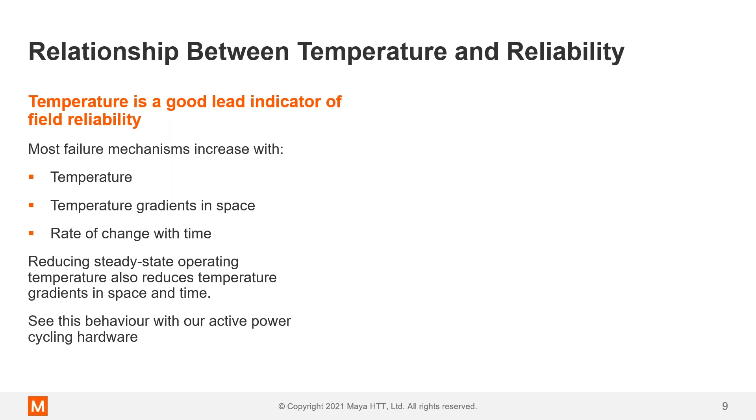I do want to point out that we offer hardware to measure the cycles of a part. We have the power tester here where we can cycle that part, and we can measure the thermal performance degradation of that part as a result of temperature cycling or power cycling, and also, when the part fails, what component within the IC package failed.

So while we generally look at, when we do a thermal design, it's mostly all about the junction temperature, but at times it's not just reliability in terms of lifetime reliability, but it's also functional or operational reliability. And that could be the steady state operating temperature of the device, but it could also be the temperature between different components of that electronics design.

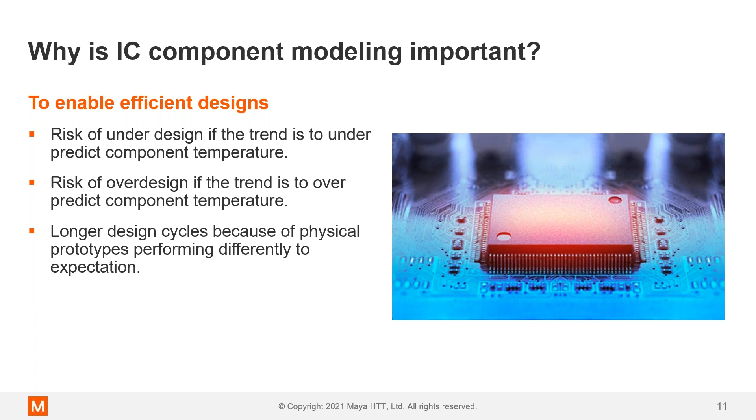So there's a number of approaches to modeling packages, and we're going to start with the simplest, which we'll call simple, all the way to the most complex. A simple model is just really a bounding box of the package. So whatever leads or solder balls or whatever, we're just representing that outline with a block with some effective thermal conductivity.

And those conductivities, it's not hugely important what those values are. They just have to be a reasonable value. I think any value between, I've seen, anywhere between like 10 and 20 watts per meter K is a reasonable value for this type of representation.

And this would be used early in design process when you may not know what parts are being used, but you want to get an initial assessment of what risks you may have, or how the thermal design might have to be driven, whether it be forced convection or yes, this part is going to need a heat sink. So you can learn things early on, even at a simple modeling level.

Generally, what we say for the accuracy of the model is that it's going to be a rough estimate of the air and board temperature. So you can't expect to model a component as a block and get any reliable estimate of any kind of junction temperature of that device.

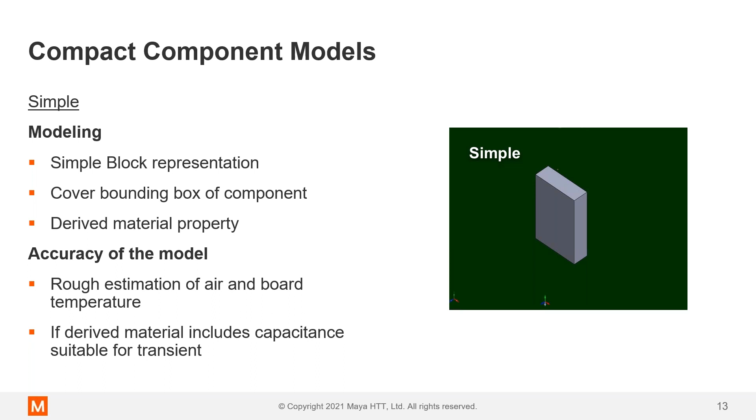One step up from that, and perhaps the most common modeling approach, is a 2-resistor model. This is common because you see a lot of data sheets for IC packages that explicitly list what the junction to case and junction to board, or junction to bottom, thermal resistances are. They're very easy to implement that way.

Essentially, we have taken the same bounding box approach, but rather than having effective thermal conductivity, we've replaced that with a resistor network to capture the heat going from the top of the package to the bottom.

The accuracy of these can vary widely depending on the heat transfer path in the model. So if you have a 2-resistor model with a big heat sink on top, getting the junction to case value correct, I think you're going to get reasonable estimates for the junction temperature.

But we do say the accuracy of this model gives a good estimate of air and board temperature. It's not suitable for transient analysis because it's just a resistor network, not a resistor capacitor network.

But I think these are probably the most commonly used. One thing worth pointing out is you could develop a 2-resistor model either numerically or via measurement.

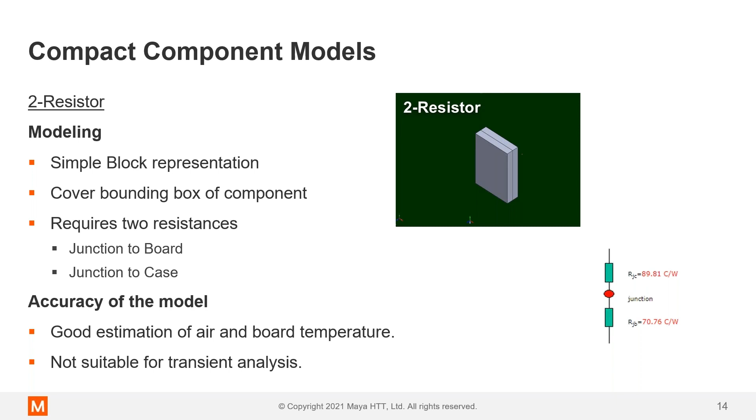So you can set up a physical measurement to do those, but you can also set up a numerical equivalent. You can easily build a top cold plate or ring cold plate model and extract what those thermal resistances are. So these could be developed either through measurement or through simulation.

The next approach would be, rather than to use 2 resistors, use multiple resistors. The most common approach to this is what's called the Delphi model, and this is a JEDEC standard. JEDEC has outlined the process of developing a multi-resistor network model for an IC component.

It essentially is, depending on the package type, you would impose, let's say, 40 sets of boundary conditions on this detailed component model and tune your resistances so that you minimize the error between the detailed model and your resistor network model.

The hope is that when you use these 40 boundary conditions, ultimately you're going to get a quote unquote boundary condition independent thermal network. That's the goal.

Some of the difficulties with this approach is knowing what topology to use for the network. You could start with a junction that's connected to all the external nodes. You might have a top inner area, top outer area, sides, and then bottom inner and bottom outer. Then you use some optimization algorithm to determine what are the best resistances to use between those.

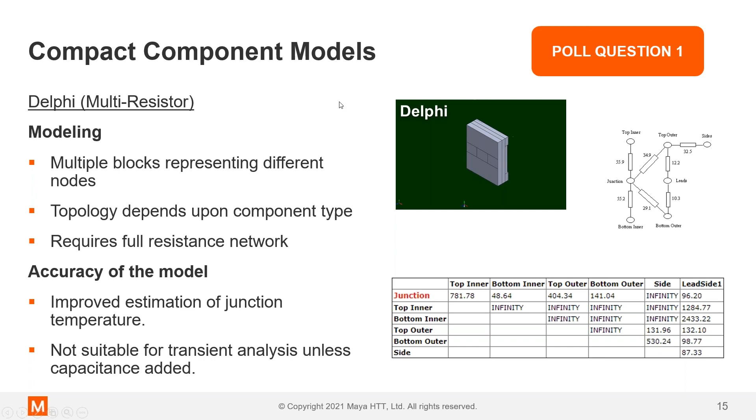The next and final approach is detailed, and we've broken it into two levels: detailed 1 and detailed 2. At this level, we're modeling the physical geometry of all the components within the IC package.

Detailed 1, versus detailed 2 over here—we have explicit lead frame, we have all the leads coming out. Detailed 1 has merged those together and would, as a result, have some effective material properties to represent this. The reason you choose detailed 1 over detailed 2 is computational expense—this would require less mesh to resolve than the fully explicit one.

The difference between these two, you have to decide the purpose of using the package. If it's only for temperature prediction, detailed 1 may give you the accuracy you need. But if you're going to go downstream and do thermal mechanical stress analysis with the temperatures predicted from Simcenter Flotherm XT, you would want the fully explicit detailed 2, which can be mapped directly into Simcenter 3D for thermal mechanical stress analysis.

This detailed approach gives you the best opportunity to have the most accurate temperature predictions. And if you have the heat capacity of the individual elements, it's going to give you the best transient prediction as well as steady state.

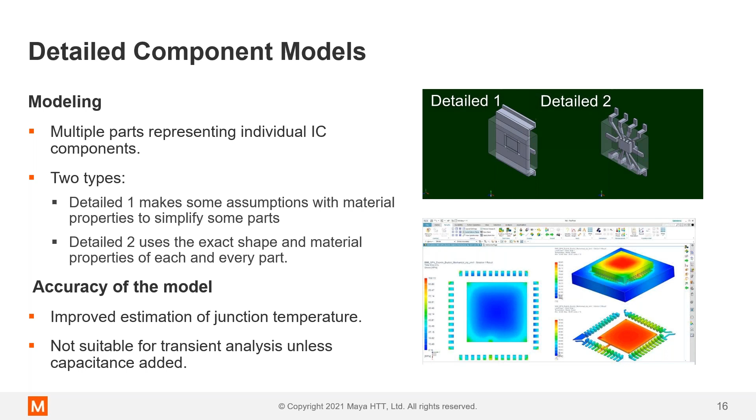Let's look at all the different modeling methods in terms of accuracy versus efficiency—those are the methods we discussed. In terms of accuracy, the simple approach is going to have the lowest accuracy. If you do happen to get accurate temperature predictions at a junction once you prototype and measure, and that simple approach was dialed in on your measured junction temperature, consider yourself lucky—that's just luck, not an accurate predictive way of modeling.

But there's a penalty in terms of time. The quickest model build time and analysis time is definitely from a simple approach where I just have a block, give it a conductivity of 10, and it has some heat dissipation—you can build a model like that very quickly. A 2-resistor model could be quick also; you get the model from the vendor or just read a couple values from a data sheet, so that's very easy to do.

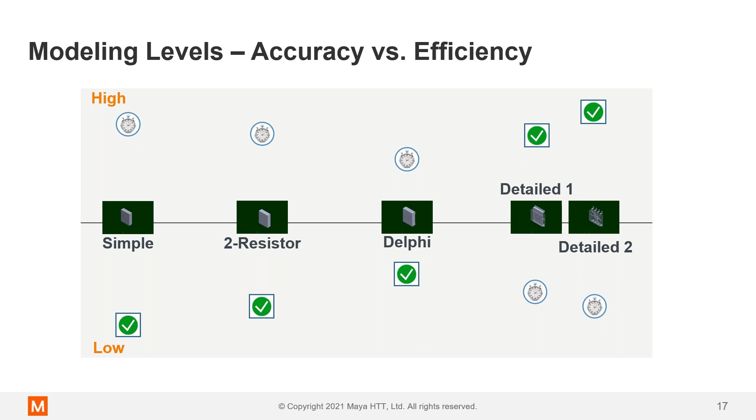So I would say Delphi could even be down here in terms of time, but computationally, once you get it into the model, it's very fast. These detailed approaches computationally are going to be very slow because I have to mesh everything, and generally the mesh is going to be higher than with all these compact modeling approaches.

If we look at the methods with a table summarizing accuracy and benefits, a couple things stand out. With the detailed model, all internal dimensions and material properties are required. So if you're a system integrator wanting to build a detailed, explicit model, it might be difficult because you're likely not going to be able to learn the internal structure from your vendor directly, so you don't have the information to build it. There's a bottleneck depending on where you are in the thermal design ecosystem. If you're an IC package vendor, you know all that detail and could easily create a detailed model like that.

Most thermal designs will use a combination of all these approaches. While the simple block model is used early in the design process, that doesn't mean you're not using that approach later too, because typically you'll choose a handful of critical ICs, temperatures, or parts that exhibit close to out-of-spec temperatures. Then you'll want to model that in more detail to get a very accurate prediction, because you don't want to risk over-designing your thermal design by not accurately predicting temperatures. Use the block approach to map where you may have issues, then augment your design with more detailed approaches in those areas. Chances are most designs will use a combination of all of these.

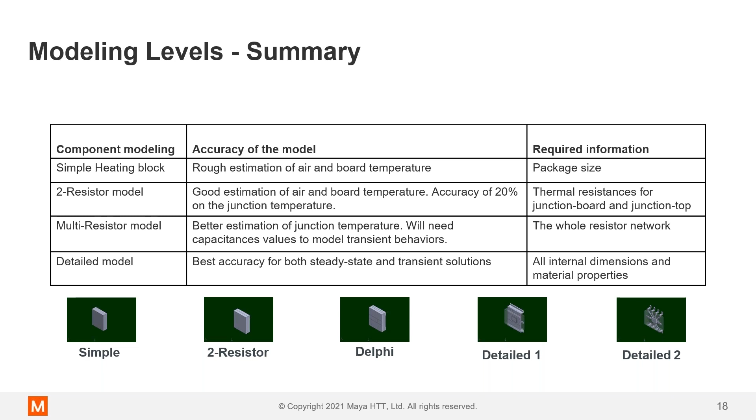I wanted to point out one other methodology we've been working on the last couple of years, called the FANTASTIC reduced order modeling approach. You could think of this as an approach to dynamic compact thermal modeling, so it's suitable for transients. It's an extension of the FANTASTIC method pioneered by Professor Lorenzo Codecasa, where FANTASTIC is an acronym for Fast Novel Thermal Analysis Simulation Tool for Integrated Circuits.

It differs from the typical compact thermal model, because the compact thermal modeling approaches we have in industry are really intended for supply chain support, where a vendor can supply a model to their customer. This is really to enhance our predictions inside thermal analysis software like Simcenter Flotherm XT, where this reduced order modeling approach currently benefits parallel design processes. Let's take all our model information from our 3D simulation model and create a reduced order model of that, so we can facilitate electrothermal design or maybe system level design.

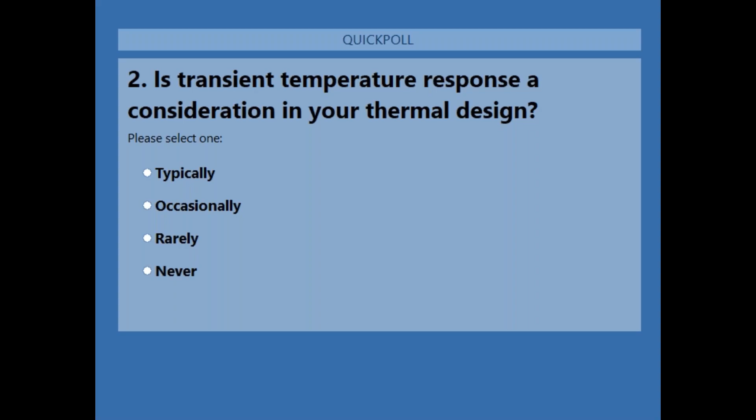And people a lot of times design to, say, a thermal design power. Here's a chip, here's the power that I should design to from the data sheet. But I see a trend over the last few years where more and more thermal design is based on, say, use case, and a lot of it is because electronics are in everything now. With our smartphones and IoT, electronics are so much closer to human contact that there are more considerations.

We have multiple environments that our devices operate in. Us picking them up and holding them—if they're too hot, if somebody thinks they're hot, that could affect the success of this product in the marketplace. So understanding the dynamic response when it comes to temperature of our end product is becoming more and more important for thermal design.

That's a great added tidbit there, John. I think we see that reflected in the responses we got as well, where the majority of respondents will see it in some form when looking at transient temperature response, with a small handful—about 9%—saying they've never seen it. So this lines up with how you've seen that shift in industry as we start seeing electronics in everything. So with that, I'll pass it back to you. Great, thanks.

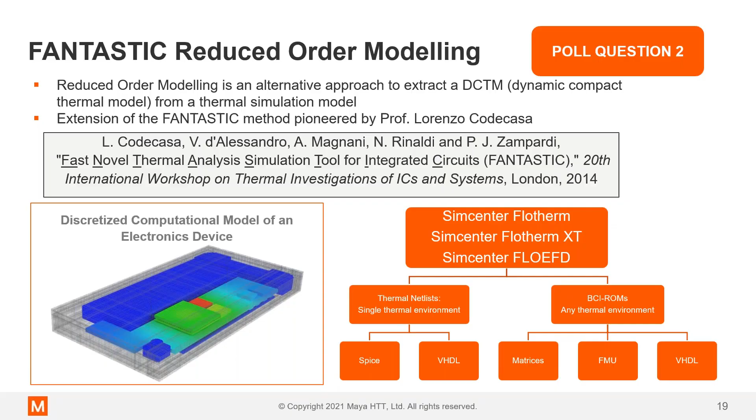Okay, so how do we go about creating these IC package thermal models? What are the challenges in generating a detailed thermal model? I've kind of alluded to them earlier, but where do you get the CAD geometry and material properties?

If you're an IC company, you might have a better opportunity of getting that information, but it may not actually be in the format you want, like a 3D solid model. So you may have to spend some time actually building up the CAD geometry. And where do you get the material properties? I don't know if you've spent much time looking at material data sheets, and I haven't for a while, but in my experience, you might be able to get a thermal conductivity, but you really get no indication of what the heat capacity of that material is.

So you end up making some engineering estimates on a lot of things just to build up a detailed model. There are barriers in collecting information and building 3D models, which may not be your area of expertise. There's also the concern of matching the detailed modeling approach to the way you're going to model the PCB. I'll talk a little bit about modeling PCBs today, but that will be a focus for next week's session. But really, when you model a detailed IC package, you want to match that with a detailed representation of the board, at least in that area. So how do you match that?

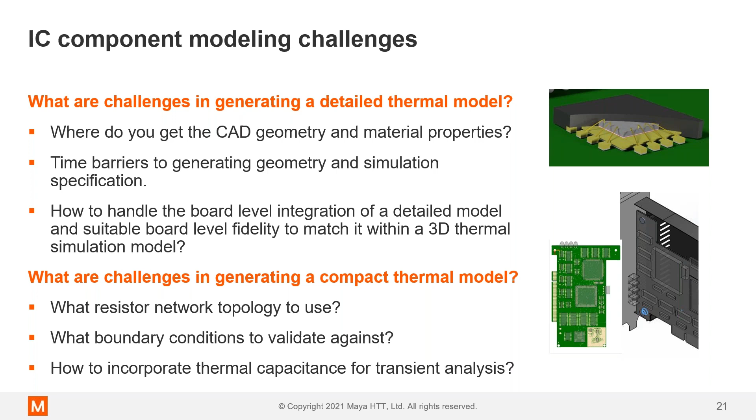And if you did want this to be transient suitable, how do you incorporate the thermal capacitances for transient analysis? There's a lot of work potentially in building these compact models or detailed models. And if you get anything from your vendor, it's going to save you a huge amount of time and improve the accuracy of your models.

One thing we offer to assist in the creation of detailed and compact thermal models, and we've had this spinner product of ours for some time, is Simcenter Flotherm Pack, which is a web-based subscription tool. At a high level, you log in and you get presented with many package styles you can start with, and then you pick the package style you're wanting to build a package for.

Historically, there's been two types of customers for this: one, the IC vendor who knows all the detailed information, and two, the system integrator, which has a need to build a more accurate predictive model but has very limited data. They have the data sheet, which may have a mechanical drawing and give them some dimensions, but certainly not all the information that is needed.

So this kind of interface supports both, where you either know all the information or you have very limited information, because once you've chosen the package style, it walks you through a wizard where you can populate the answers with your known data, or have Flotherm Pack fill in those blanks for you. So at the end, you have a reasonably accurate predictive model based on common values used in industry.

Once you have that, then you can either download the detailed model and run it in Simcenter Flotherm XT, or you click a button to generate a 2-resistor or Delphi compact thermal model. So all the technology or decision making to develop a Delphi model is integrated in this tool. You just click a button, say I want the Delphi model, and then it emails you once it's complete.

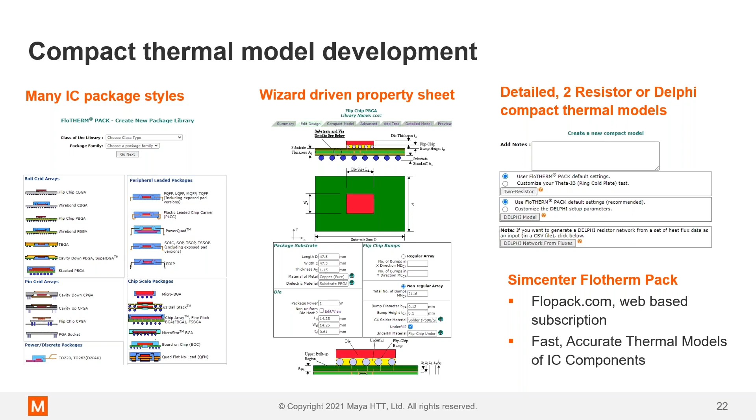The other method is relatively new, where we have this Flotherm Package Creator, which I'm going to talk about. I'm going to do it through a worked example within Simcenter Flotherm XT, and look at the workflow that you would use.

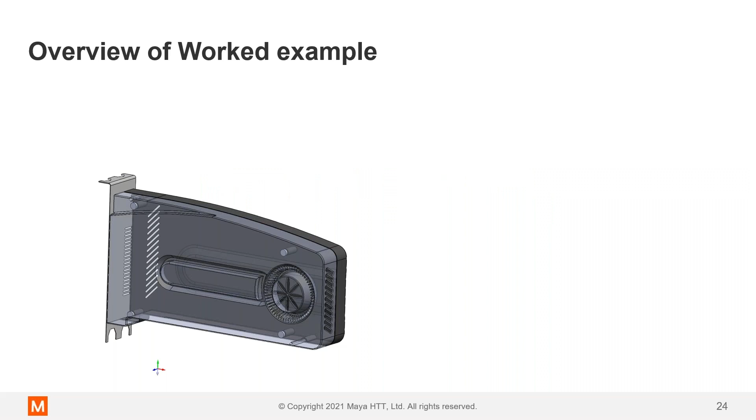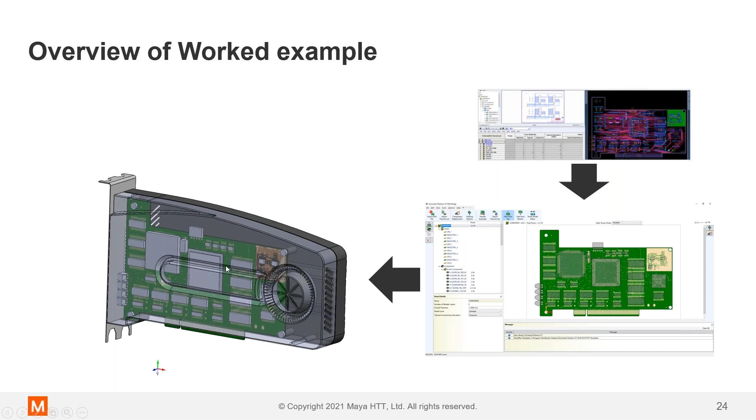Typically, when you're doing a thermal model in Simcenter Flotherm XT, you're going to start with CAD. You have some CAD data, and you also have ECAD. So say a routed board in Expedition, you read that board into Simcenter Flotherm XT EDA Bridge, you bring that into Simcenter Flotherm XT where your CAD model is, and then you analyze it and get the temperatures that you're looking for.

To model the board, we've read in the design. Here we've identified 5 components that are deemed critical, that we want to model in more detail.

Since we're going to model these little SOP packages in more detail, and we notice there's copper in this area, that's going to affect the way we want to model the PCB. We want to not smear this copper all across the board. We really want this discrete area where we have a lot of copper represented in our board.

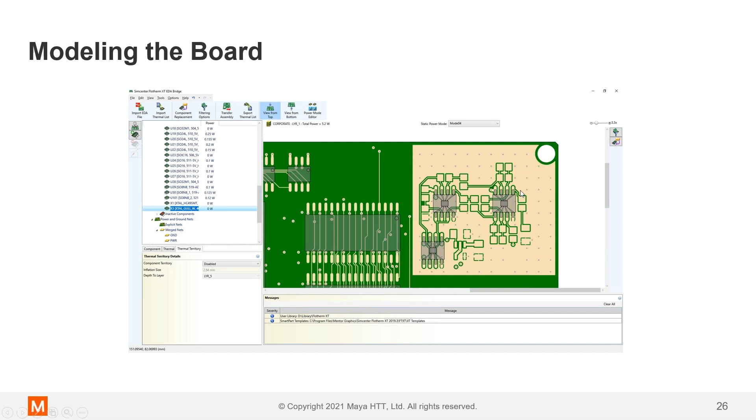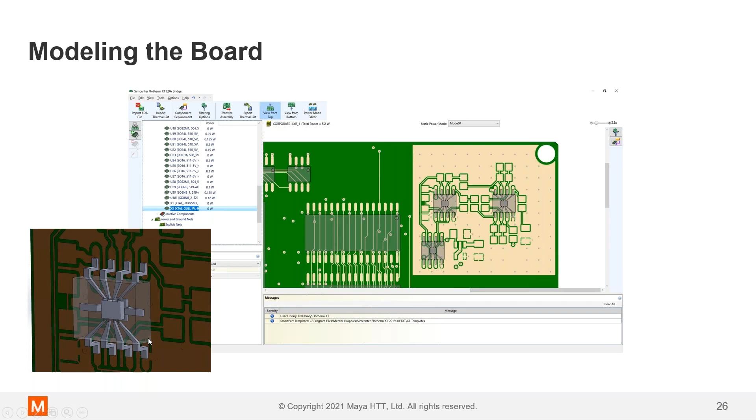So we're going to swap those components with a detailed approach. And after we transfer to Simcenter Flotherm XT, we have the explicit copper represented and a detailed representation of that package. So, how to create the package model.

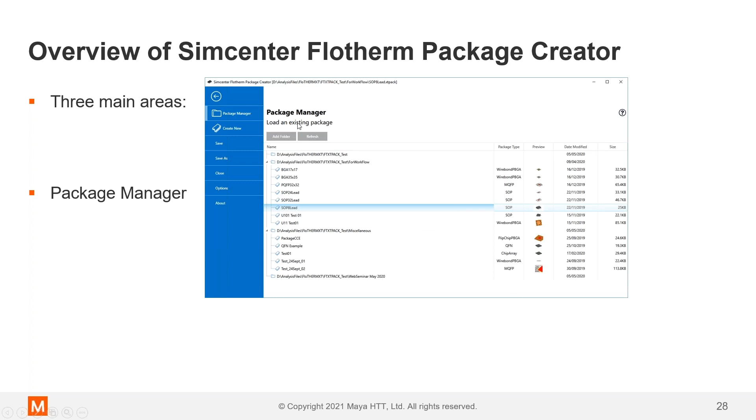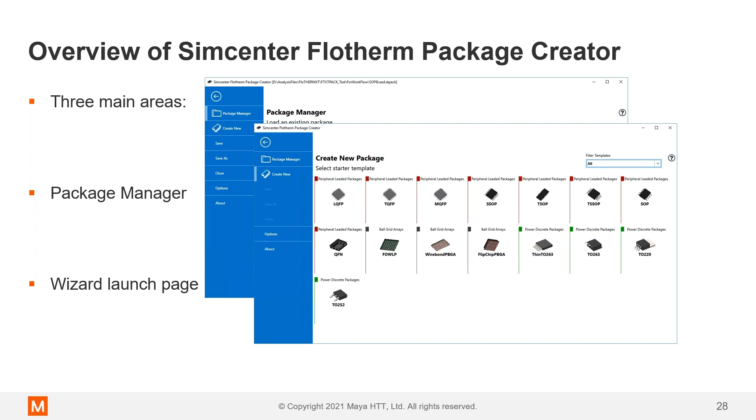I want to introduce you to Simcenter Flotherm Package Creator. There are 3 main areas: the package manager, these are packages you've already created; the wizard launch page, very similar to Simcenter Flotherm Pack, where you start with a wizard based on the package type; and then the package detail, once you've worked through the wizard, where you have the opportunity to modify values and make some thermal modeling choices.

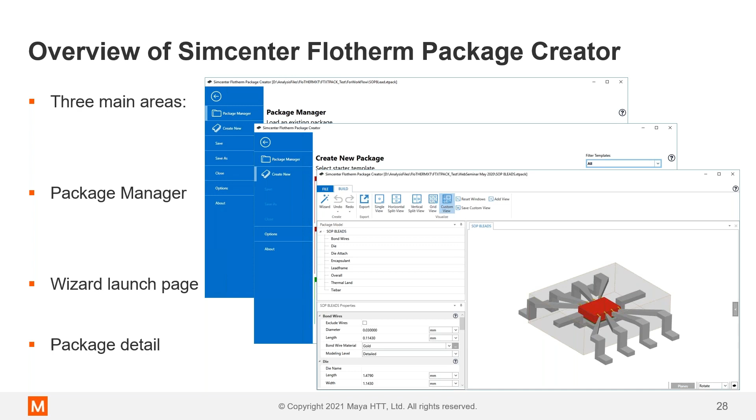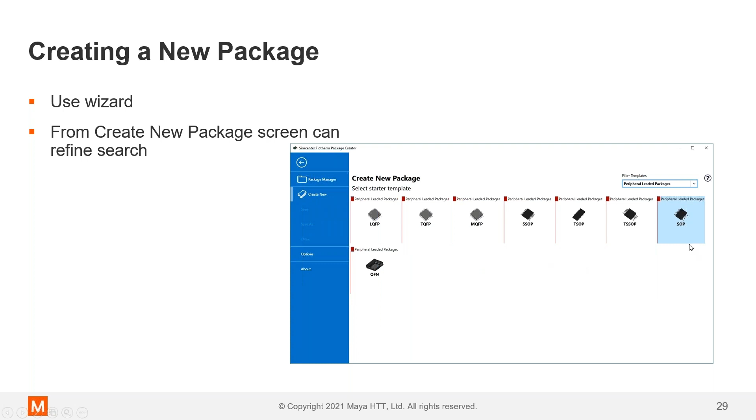From the Create New Package screen, you can refine the search for certain package types and then make your choice. In this case, it was a SOP that we wanted to use, and then we launched the wizard. Give it a name, standard outline, and then we have all these parts that we can use directly or start with. Pick the one that makes the most sense based on the package we're trying to model. So this information, we're going to read off the data sheet.

Give it a power, and the die size is automatically populated. Again, we can change these values here or in the property sheet once we've worked through the wizard. It asks us this up front because die size is very important in terms of the overall thermal performance of the package, and whether or not this particular package has an exposed pad.

Lead frame material—once you've worked through the wizard, you see all the package information. The areas of the interface are what we're calling smart parts, all the different sub-assemblies that would be used to build up this part, each with its associated property sheet. Over here is just a graphical display of that part.

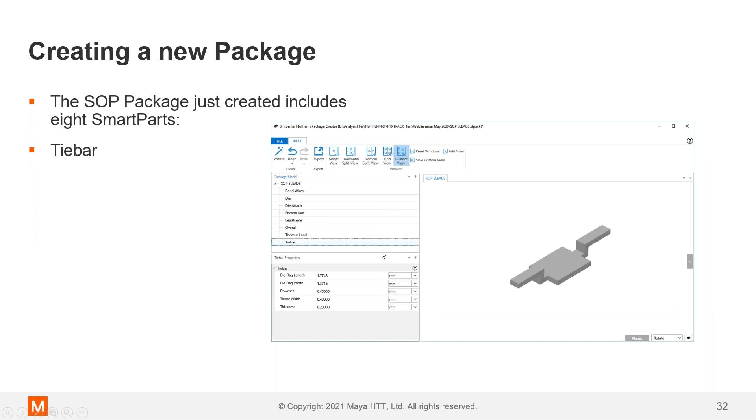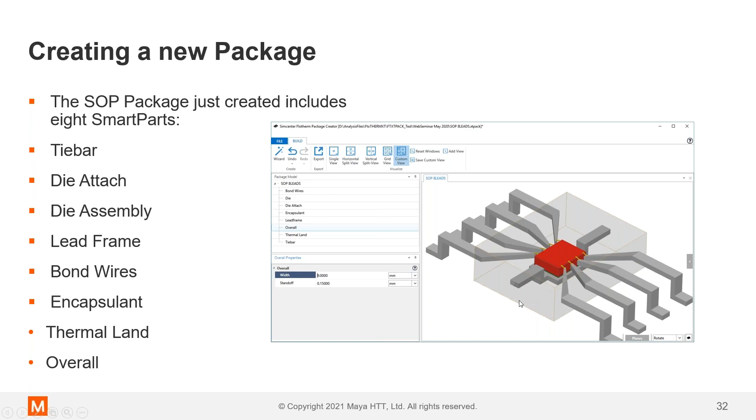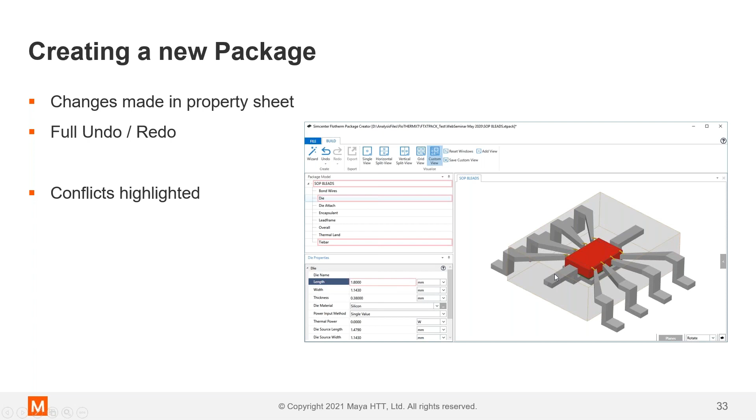So for this SOP package, we have a tie bar, the die attach, the die assembly, the lead frame, bond wires, the encapsulant, and thermal land if we have one of those, and overall. We can make changes and see it update in the user interface window. It supports full undo and redo, and it highlights conflicts—if you've put in information that doesn't allow it to build a physical geometry, it's going to flag that to you.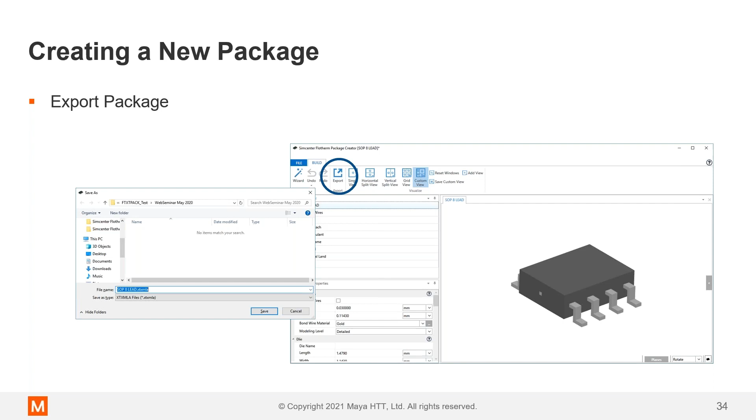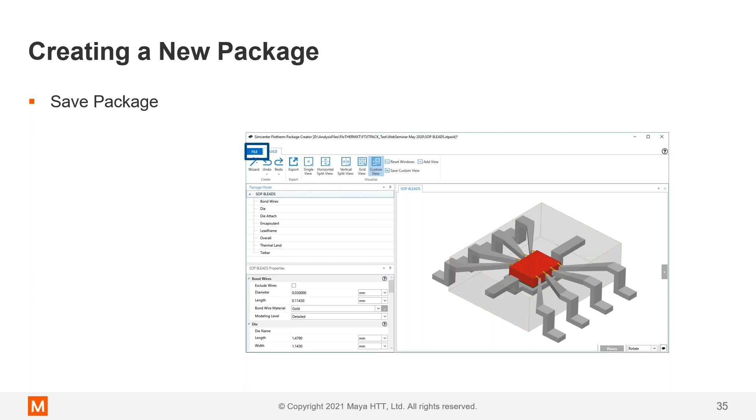Once you've built a package, you can export it into this XT XML-A format. This is a format for Simcenter Flotherm XT, a human readable XML file that defines the construction of that package. So it's a shareable package for you to bring into Simcenter Flotherm XT or share with a colleague or a customer. You can also save it directly here, as part of your interface in Package Creator.

And you could also load—somebody provides you a model, you can load it in here, make changes to it, and then save it out again.

Take a quick look at if we did a BGA. So we're also using a BGA package in our model. Some things to highlight as we walk through the wizard—it's probably kind of difficult to see here, but the package size, number of solder balls, and the die size are some of the major choices there.

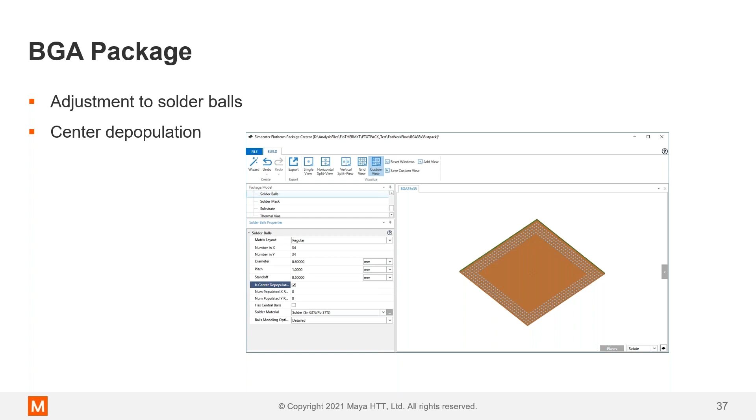Once we work through the wizard, we see all the solder balls are here, but we can say it has a center depopulation here, but it has central balls. We could do it that way.

And then some examples of modeling choices would be if we want to not model each individual solder ball, but model those areas with an effective conductivity, we can do that, and it can calculate the material properties just based on this quick setting.

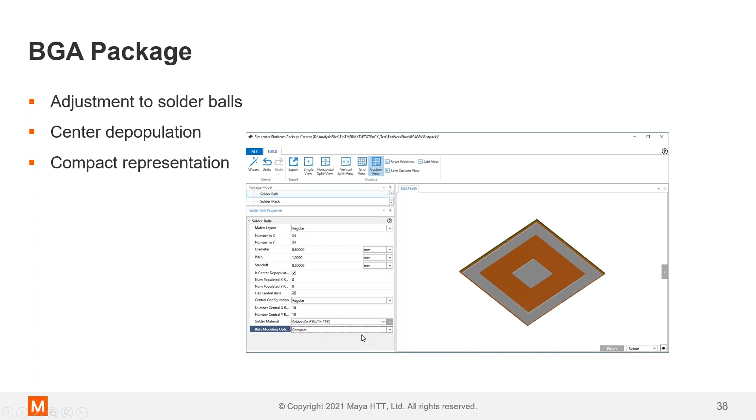Another area we may choose to make modeling choices is bond wires—whether we model the bond wires at all, or if we model them in a compact way, so there's less meshing. It could be that our bond wires aren't critical for our temperature prediction, but we want to include them, so we may choose this option right here.

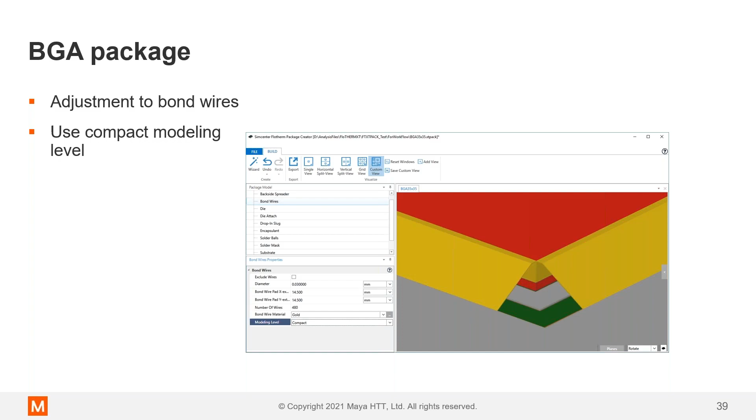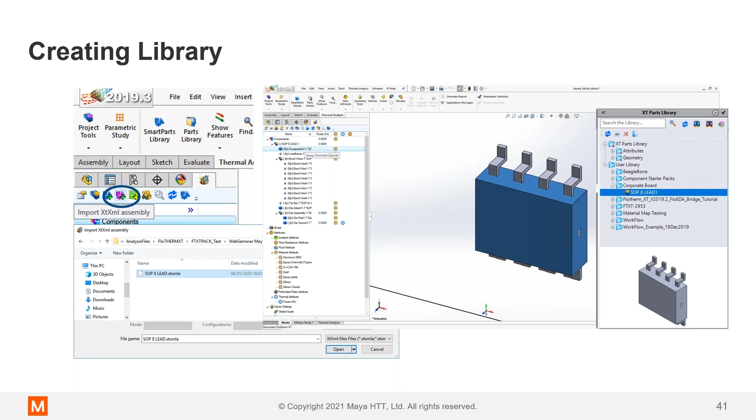Okay, so create a library. Once I've built up the models and saved them to disk, I can, inside Simcenter Flotherm XT, import those assemblies. There I see the part in Simcenter Flotherm XT, and then I can just drag it over to my library. Once it's in my library, I can use it in the EDA bridge to swap components.

So we have our model, we have our CAD—we just have the CAD. We haven't identified this as a Simcenter Flotherm XT model. The way you do that, just quickly, is you walk through a wizard to help set up the model.

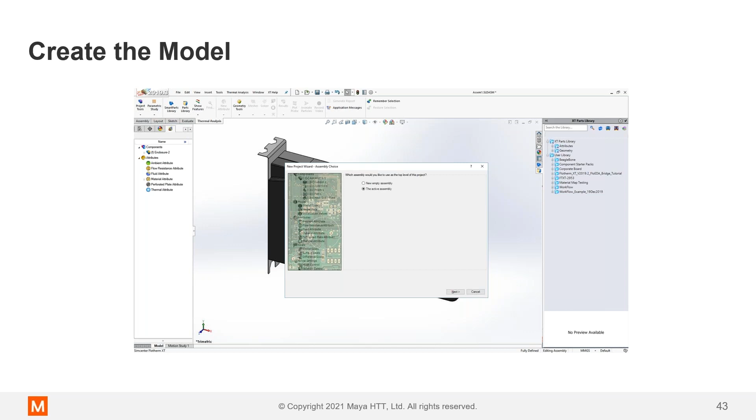You have a choice—do you want to start with the empty assembly? In this case, we're going to start with the active assembly. We have a CAD assembly opened, and we're going to build a Flotherm XT model based on this assembly. We've walked through the wizard, and at the end, we have our Simcenter Flotherm XT model.

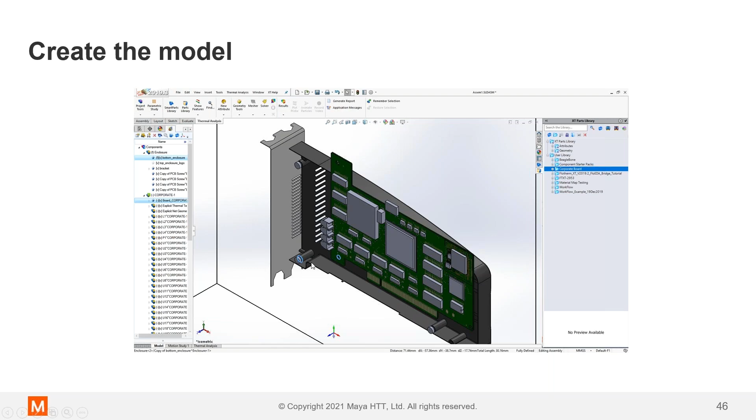I'm going to show you, I'm going to position the board. I just have these 2 edges selected, and I'm going to make them concentric. Now it's located properly, and then I can mesh it and solve it.

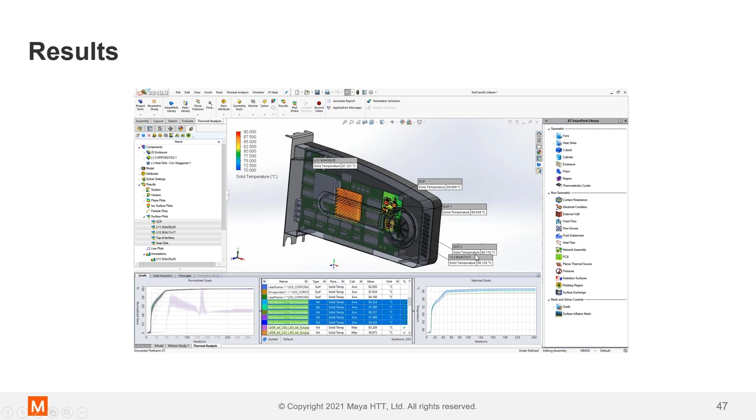So I've added a heat sink, and we'll just take a quick look at some of the results. One very useful feature for Simcenter Flotherm XT is this ability to color components with respect to their temperature limit, whether it's junction or case, so you can easily flag which components are critical. Like I said, next week's session is going to talk about the EDA bridge interface in more detail.

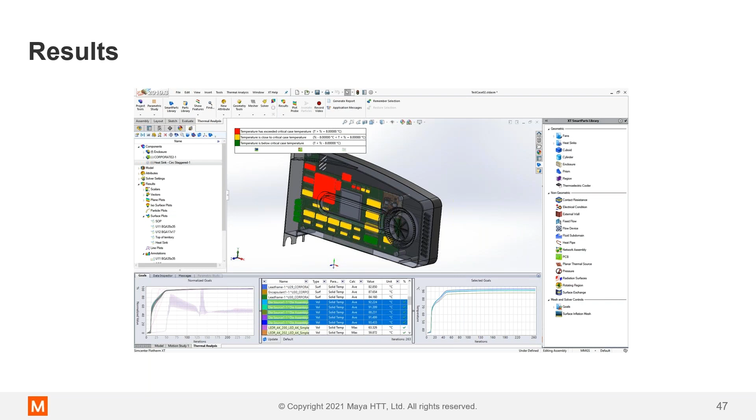This is just kind of a quick workflow example. I can also get that information out in a table where I can see the temperature limits and what the actual temperature was, and the cells are colored by how close they are to their temperature limit.

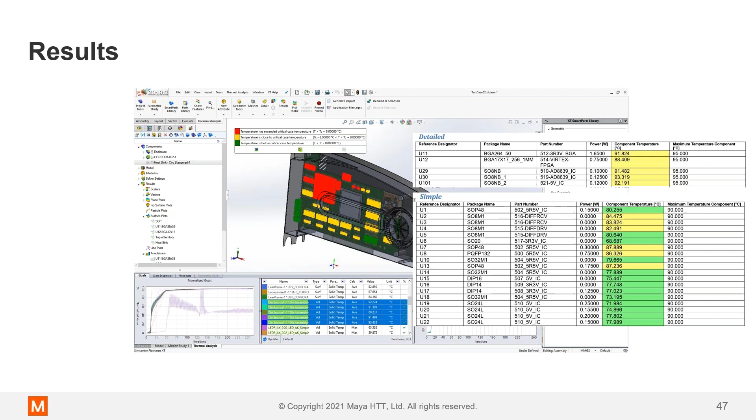Once you've done that, you could use Flotherm XT to look at the efficiency of heat sinks and vents, or even touch temperature. A lot of thermal designs, like I was saying, electronics are everywhere, very close to consumers, where it can actually touch them. So many times the limiting factor isn't the actual junction temperature of the IC chip, but the external enclosure temperature. So for many thermal designs, the external touch temperature is the driving parameter, and that's why we're highlighting it here.

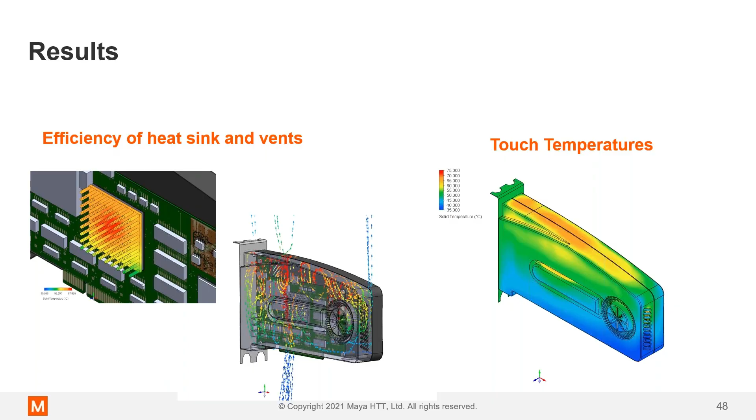So that was just a quick workflow example where we have two methods of developing detailed packages: Simcenter Flotherm Pack, and the Package Creator. Package Creator allows you to create detailed models suitable for, say, downstream thermomechanical stress analysis. The detailed models in Simcenter Flotherm Pack would be representative of a detailed approach where you're not going to want to model the explicit geometry, but a quasi-detailed approach where I can get a good predictive model without modeling, say, the bond wires in physical detail.

For compact model development right now, Flotherm Pack is what we offer for developing the Delphi models or two-resistor models. And then, of course, we have the BCI-ROM approach, that isn't used within the CFD software, but the software is used to develop them for parallel workflows.

Now, so we have a lot of opportunities to build detailed models, but just because we added all the explicit geometry and attached materials to them doesn't mean they're accurate. They have the best opportunity to be accurate, but the only way we know they're accurate is if we can validate them against a measurement.

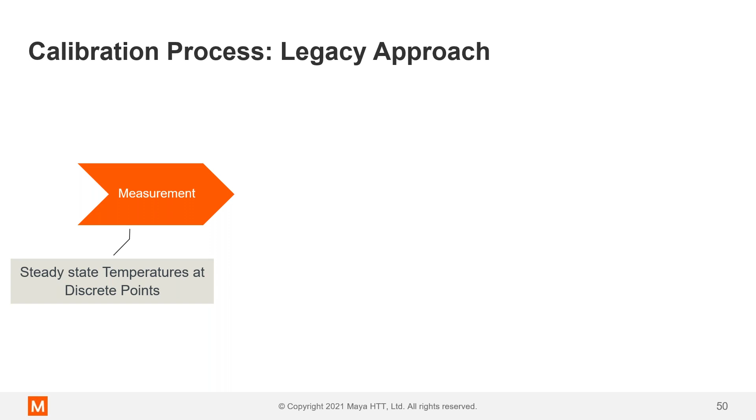So let's look at a legacy approach of how you might validate a detailed model. They all start with measurement. You need something to validate against. Many times the measurement is steady state temperatures at discrete points, like an on-die sensor or a thermocouple on the outside. There are some discrete areas where we're measuring a temperature at a given power.

The next step would be, we build a model like we would before with our best estimates for material properties and physical construction. Then we analyze that, we iterate, we guess and inspect and simulate. So we look at results, we change values, we look at results again, and we go round and round until, honestly, what happens is you run out of time. And many times you rationalize that what I've done is good enough. It's better than what you had, but is it accurate for everything? No, it's not, but it's better than what I had, and we hope it's good enough.

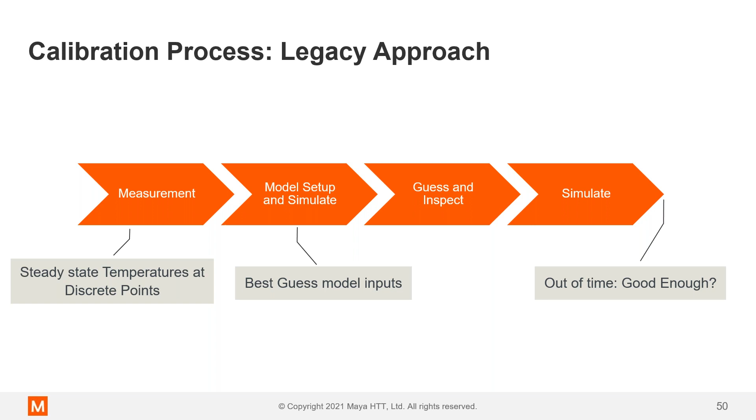That's kind of the legacy approach. It's very limited by time and engineering expertise—how well are you, how experienced are you at trying to modify a model and tune it to measurement results? So that's one of the issues.

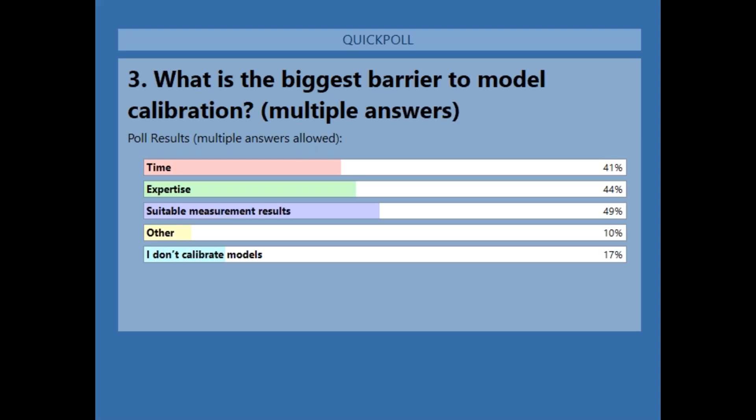Okay, yeah, in my experience it's all over the map with the ways to answer that poll question. There are some customers that really have a great process of validating their thermal models, and it depends on what level, where you are in the thermal design ecosystem. If you're an IC package vendor, it might be easier to calibrate a model, and system integrators more difficult, because you're building models based on a lot of data that's been shared to you.

I think if I had to say, what is most common is a lot of people go through one design process, build their prototype, measure the results from that, and look back at what their thermal analysis was telling them, and might leverage the information learned from that to build a better design the next time around - so a better model for the next design. You start to learn where your assumptions are affecting your accuracy, and build that into the next product you develop, rather than a dialed in, repeatable, scalable calibration process. Just from learned experience, build better models next time around. That's probably the bulk of what I see, I would say it falls into that category.

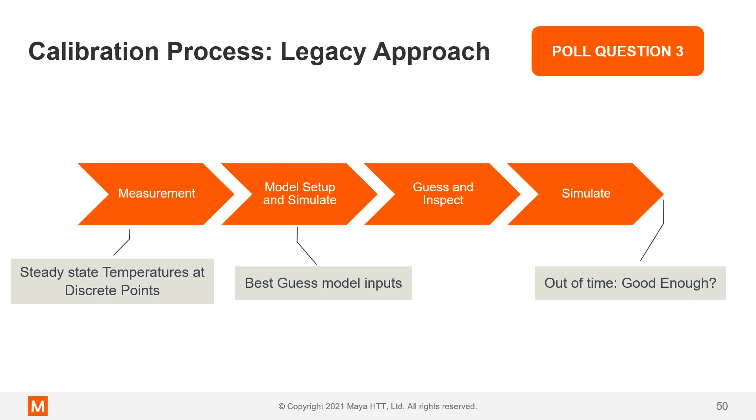I do want to point out, a lot of the measurements are kind of steady state, and if you're just trying to calibrate to point values, there's a risk of getting the right answer for the wrong reason. These pictures here don't maybe illustrate it that well, but you could have two materials of different sizes and materials, and they could both provide the same thermal resistance. So in essence, if this stack up here was encapsulated and you didn't know what was inside there, the stack up could be different, and to be honest, these are going to give significantly different transient responses. So it's much easier to calibrate to steady state temperatures, but there's a much higher risk of getting the right answer for the wrong reason.

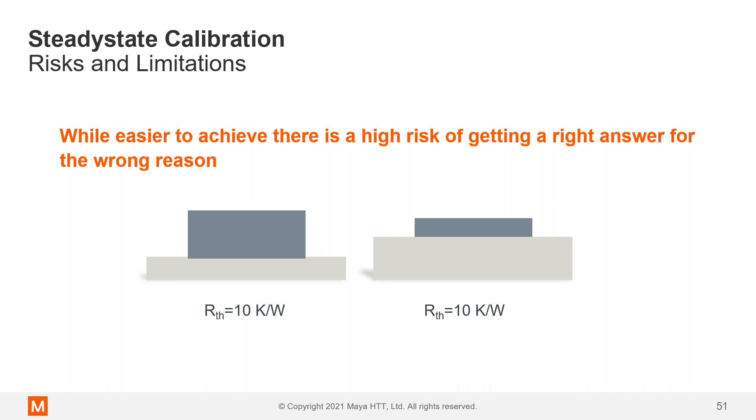Now, if all you're designing to is steady state temperatures, this may be okay. But if you're trying to develop a model that's accurate for dynamic temperature response, then you really need to calibrate to a transient temperature measurement. That brings us to the T3Ster measurement - our calibration process in Simcenter Flotherm, Simcenter Flotherm XT, and Simcenter FloEFD is based on the T3Ster measurement.

And this is the thermal structure of the heat transfer path. If we just take a look at a simple package here, this area would represent the die attach, die flag, mount, and the cold plate. So you can't tell this information by looking at this one plot, but I just want to highlight that this structure function is actually a map of the entire heat transfer path from source to sink.

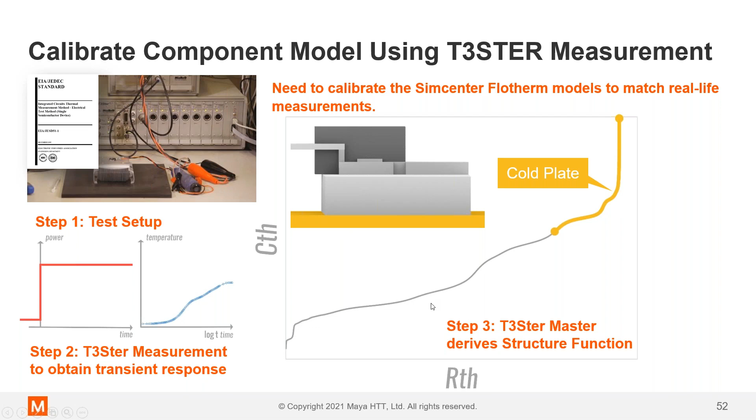And this is what we're going to use to calibrate our thermal model. We would build a Simcenter Flotherm XT model of this measurement setup, with all the detail of the package mounted on a cold plate, and exercise it to tune it to match this curve. So the automated calibration method would be to have your model and then do a design of experiments and optimization with this calibration interface to minimize the error between that structure function, the transient response, versus your detailed prediction of that transient response.

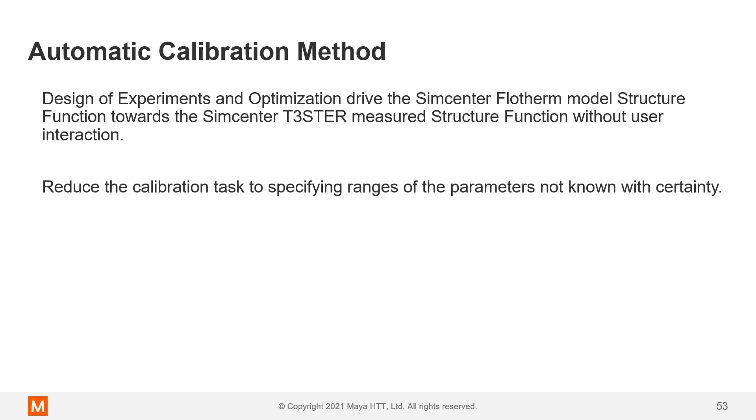So really, it reduces the calibration task to specifying ranges of the parameters not known with certainty. You define your design space and tell it how many designs to do, and it will minimize the error between the measurement results and your predictive model. We'll show you an example here.

The process becomes: you start with the measurement. The T3ster measurement is a great measurement to calibrate to because, like I said, it's transient and gives you the thermal structure between the heat source and the heat sink, instead of point values along the way. When you're setting up the model, you're setting up the design space and using the auto calibration setup to explore that design space and optimize the parameters to match the measurement results.

So at the end, you have a fully calibrated model. It will tell you the accuracy of that predictive model, how well it was able to match that structure function. So at the end, you have a process that performs this and gives you the result in terms of how accurate that prediction is.

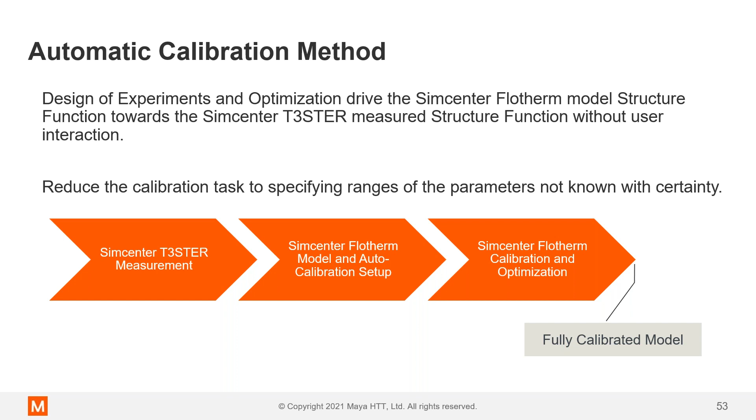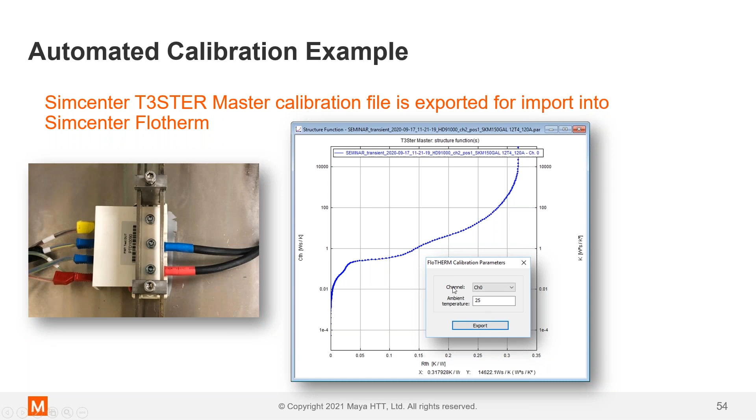So the process would be, we start with the Simcenter T3ster measurement where we have an IGBT. The software with the T3ster calculates this structure function, and then we can export that to a file that can be read into any one of our softwares that I mentioned before. We'll be looking at Simcenter Flotherm. That's the example I've set up.

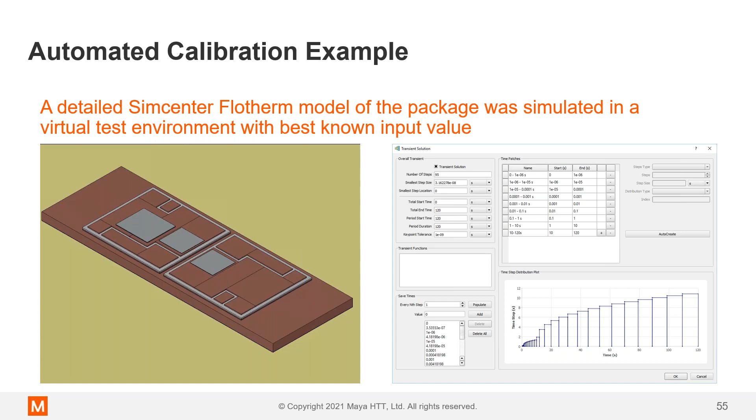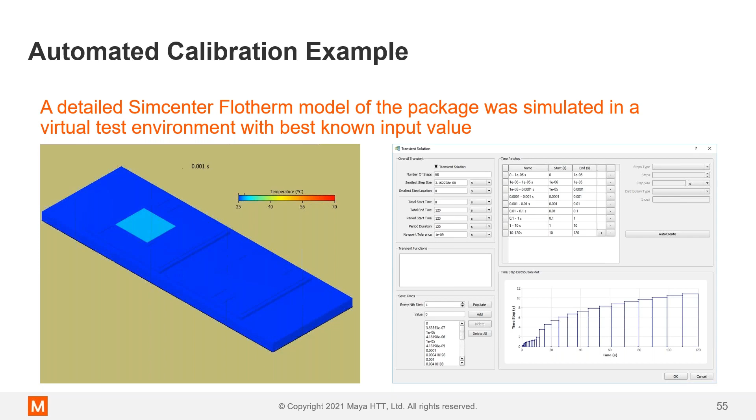So we start at microseconds and all the way up till we reach steady state here. And each decade of time, you would want, say, 10 to 15 time steps across that to accurately represent the structure function and the measurement fidelity. So that just gives you an indication that this is a transient correlation and we need to have a transient analysis.

So we want to quantify these areas that we're uncertain about. Some of the areas that we typically see that are uncertainties are the active area of the die. When we build thermal models, we generally just have the heat dissipation across the entire footprint of the die. That isn't accurate, and tuning that area can have a significant effect on the transient response of that chip. So active area size is one.

The other one is material properties, thermal conductivity, heat capacity. But another really important one, and I think something that is never captured in thermal models, is the contact thermal resistance. When we build a thermal model, we have one material adjacent to another, and just by default assume they're perfectly connected. Even with the thermal interface material, we just use whatever we read off the data sheet. But there could be a contact thermal resistance there that we're not capturing. So just looking at if we perturb those contact thermal resistances a little bit, does that improve our accuracy? Those are the things we typically look at.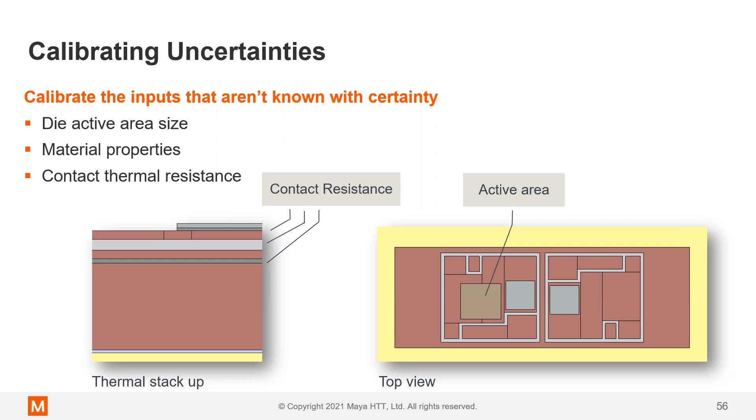So this would be Simcenter Flotherm. We have set up our design space, and this is our calibration dialog here. In this example, I've broken up the calibration process into two phases. The first phase is that area around the die, and then the second phase will be further along in the thermal path. But I have a short video we'll talk through here.

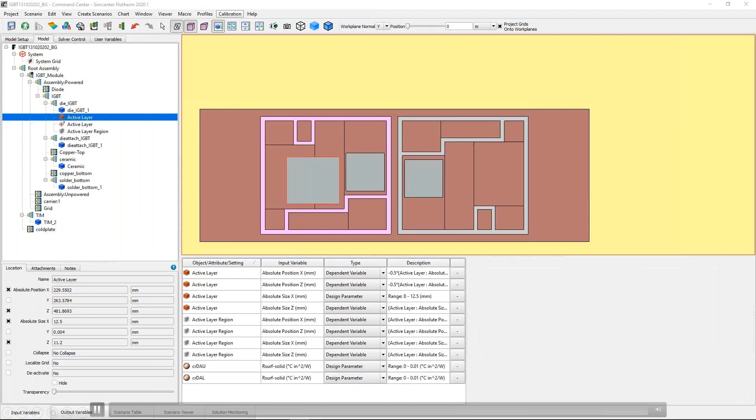I'm setting up my design space where I'm going to modify the active area and some conductivities. I import the T3Ster measurement. We read in the structure function here, the blue line is from the measurement. I can do a setup check to verify that my Flotherm model is the same as the T3Ster measurement. I see the power, the duration, and the initial temperatures are the same.

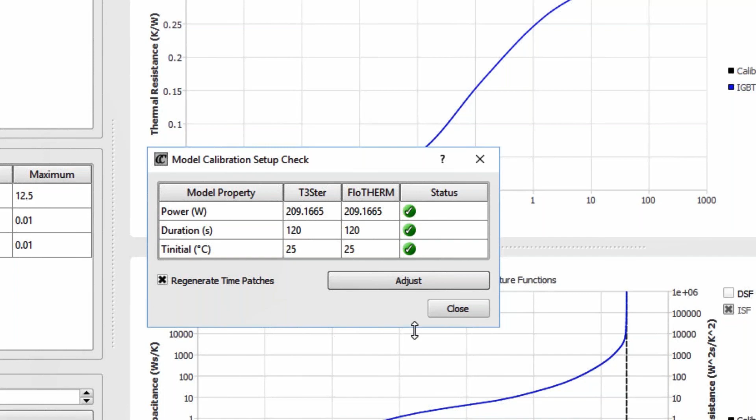So I'm good there. The next step would be to identify what temperature within the model I want to use to correlate against. Once I've done that, it can calculate a structure function from the model, the red line, and we see there's quite a disparity between the red line and the blue line.

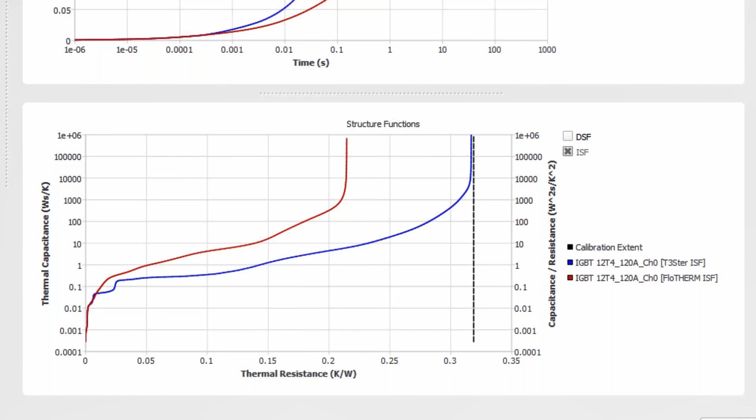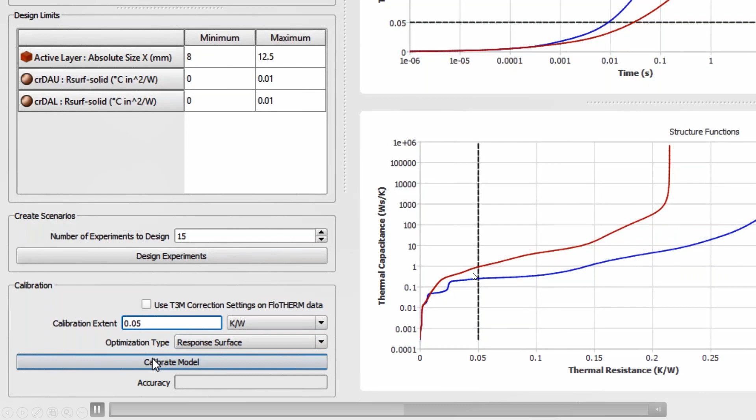I have my design space here. At a minimum, I'm going to do 5 designs for each input, so that gives me 15 designs. And I'm going to adjust the calibration extent, so when I'm calculating the error of the response, I just focus on this area, because that's the area that's going to be affected by my inputs.

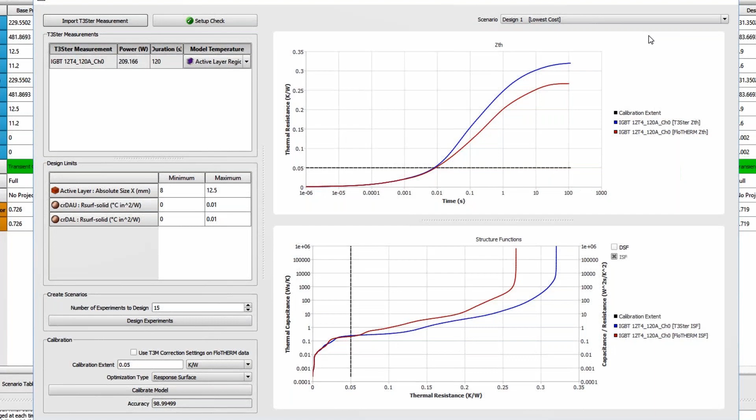So I did all these designs. If I just switch to the lowest cost, I could see that I'm much better representing that response around that die attach area with just 15 designs. We also get other things, like I said, it does a design of experiments here.

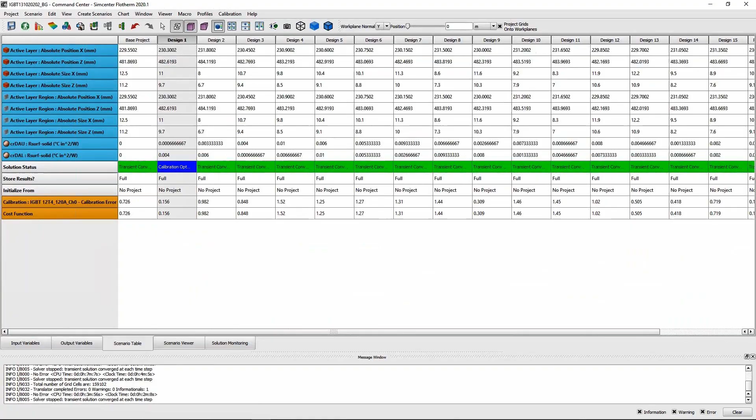Let's just look at the active area. We see it's a little bit smaller than the full footprint of the die. But like I said, we do a design of experiments, and we can see the response surface, so we can see how the inputs we decided to look at are affecting our outputs.

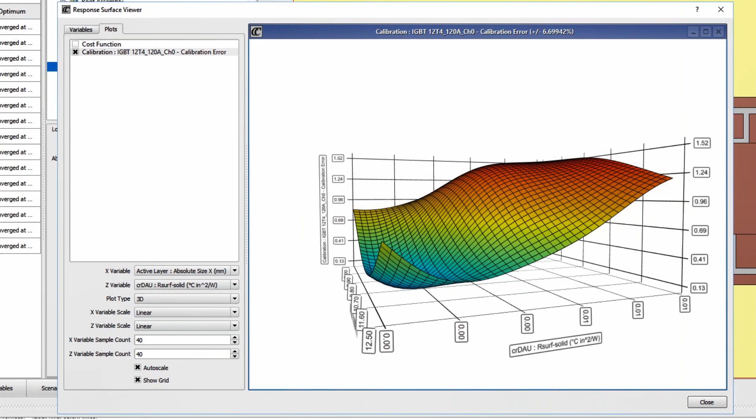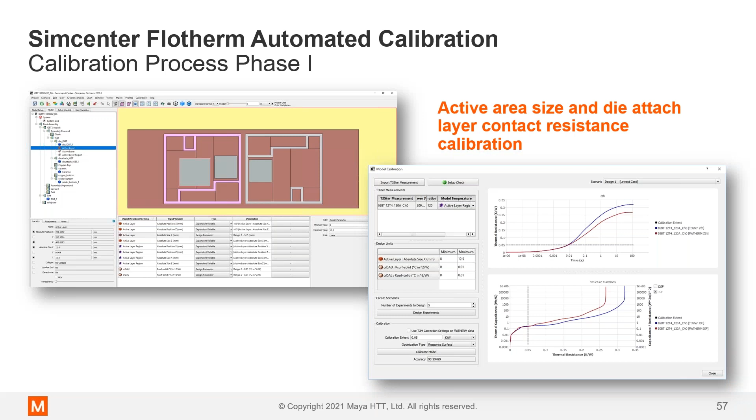Once I've done the calibration of this first phase, I save it out, and I could do the second phase of my calibration further down the heat transfer path. Rather than show a demo video of that, I just have the result here. In this second phase, I'm looking at the ceramic and solder layer contact resistances. I'm not modifying any of the material parameters I've built into the model, just contact resistances on either side of those interfaces. And if we look at the lowest cost, the best design from this second phase, I can see I'm very well matched to that measurement result.

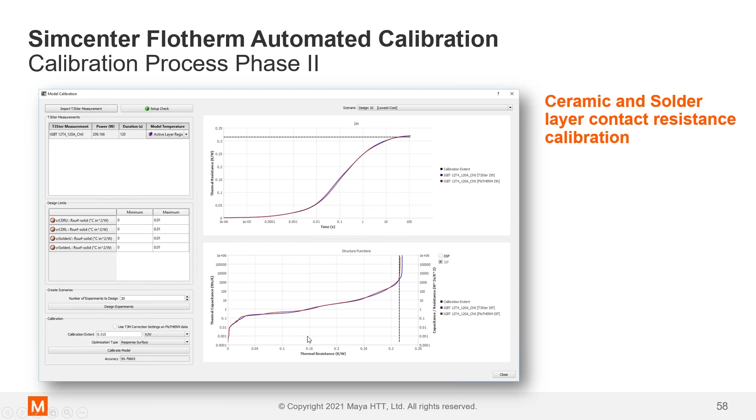So if we compare the uncalibrated result to the calibrated, we see we get a much better match. And the ultimate final values here, this is the active area I changed, so I just changed it a little bit from the full footprint of the die that I had initially. And for the contact resistances here, these are very small values in my opinion. So I just modified those values a little bit, but I was able to much more accurately represent the physical measurement by just modifying these values a little bit.

And this process, if you had to do it manually, it would be so time consuming that it really wouldn't be practical in your typical design process. And we may not, I didn't point it out during the video, but as part of that calibration process, it reports the error, how well it was able to match along this curve, and this was greater than 99%. Like I said, I didn't do that many designs. You could do more designs and maybe get better matching, but this is an example. So with 20 designs and a numerical prediction of where the best would be, I got a good, great correlation, really.

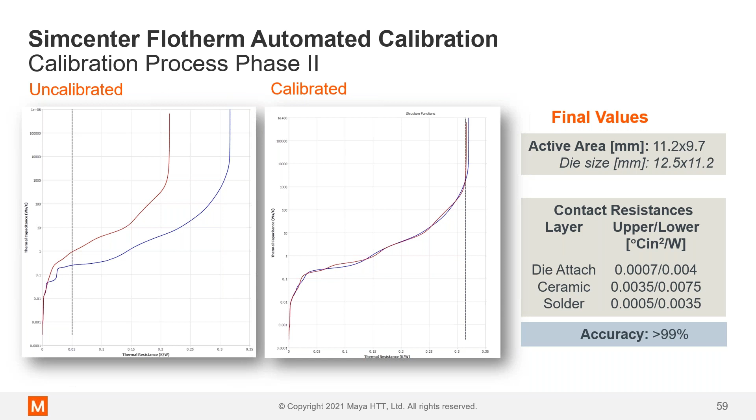So in summary, junction temperature is a good lead indicator for reliability. I've recently, over the last couple of years, reminded myself of that and discuss it anytime I can at the beginning of a presentation, because in our thermal design process, we always look at junction temperature. Why is junction temperature the driver? It's because it's a good lead indicator for reliability of that product.

Simcenter Package Creator and Flotherm Pack create IC package models from two-resistor to explicit detailed, so that's what we offer to enable you to create detailed and compact thermal models of IC packages. And I briefly touched on BCI ROM, which is enabling technology currently for parallel design flows. We looked at the automatic calibration process and how Simcenter T3Ster measurement is really well suited for this type of calibration methodology. Once you calibrate against that, it's good for any kind of steady state or transient profile you might put on that device in any kind of system.

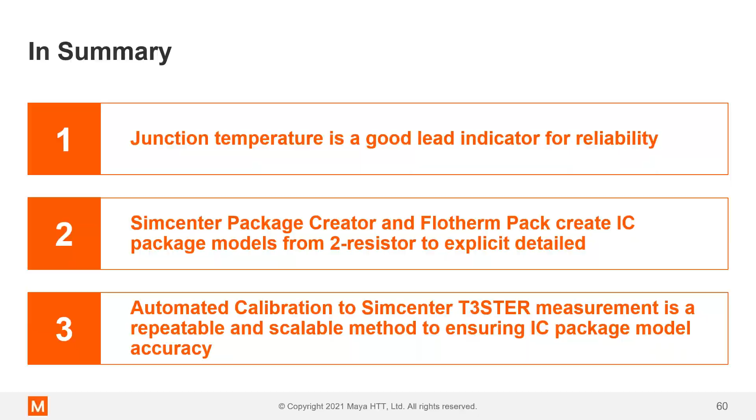Okay, so that briefly, that's what we discussed. But I'd be happy to take any questions and try to answer them.